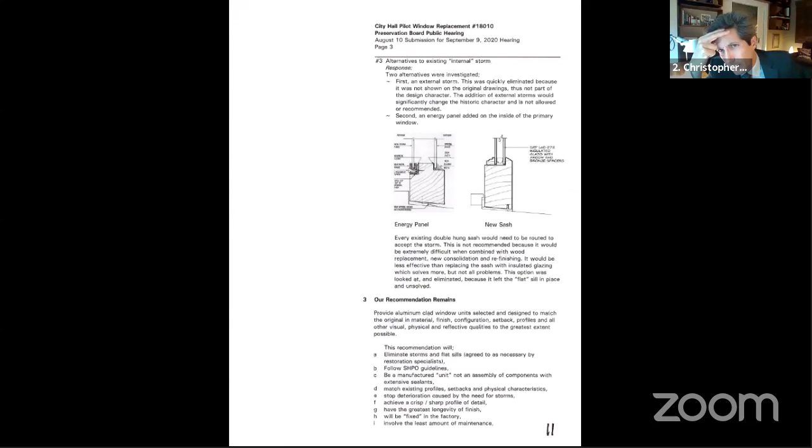Okay, so Mike, plus they're old, plus, I'm sorry to interrupt, Gerald, but plus it's old growth. I mean, they don't grow wood like that anymore, unfortunately.

Well, and that's part of my worry. Part of my worry is we're taking out old growth sills and replacing them with new materials, which might not match. Rotted old growth sills. So, okay, so Mike, following up on that, my last question is about materials.

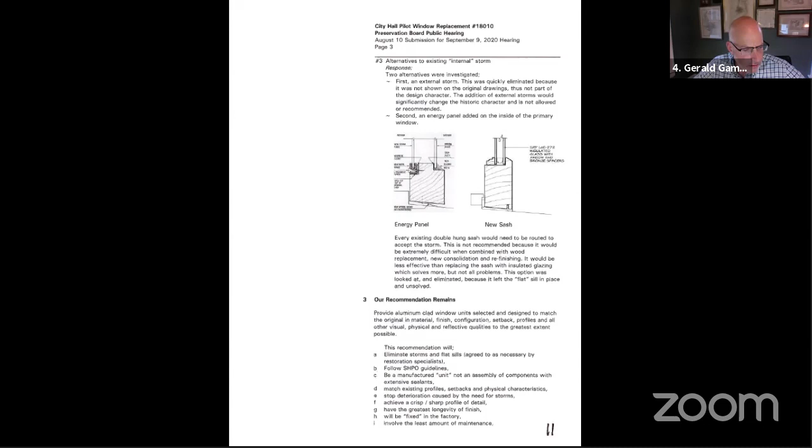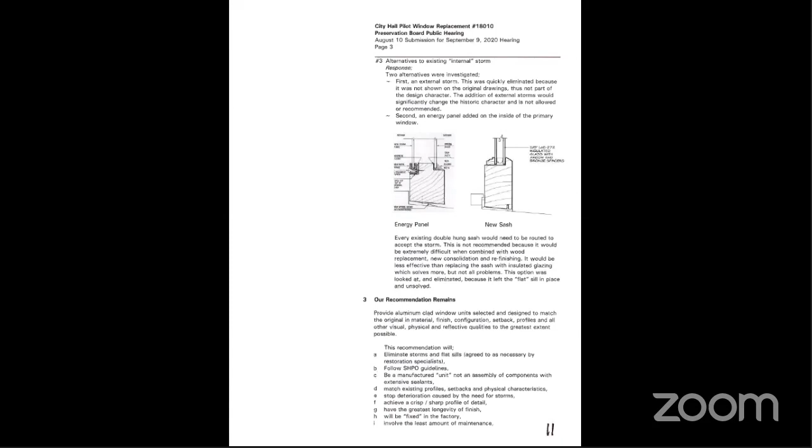What are the current sills, wood, and the current windows wood? That's my understanding, is that right? Yes. Okay, so what would the material be for the new sills? All the new windows would be pine, but they're covered with aluminum. And I don't know, Chris, I'm not sure who kept the window sample from last time.

Mike, just so you know, we're all in our homes. So even if Chris has the sample, we can't actually hold it tonight. It may still be in the office. I was hoping he could hold it up.

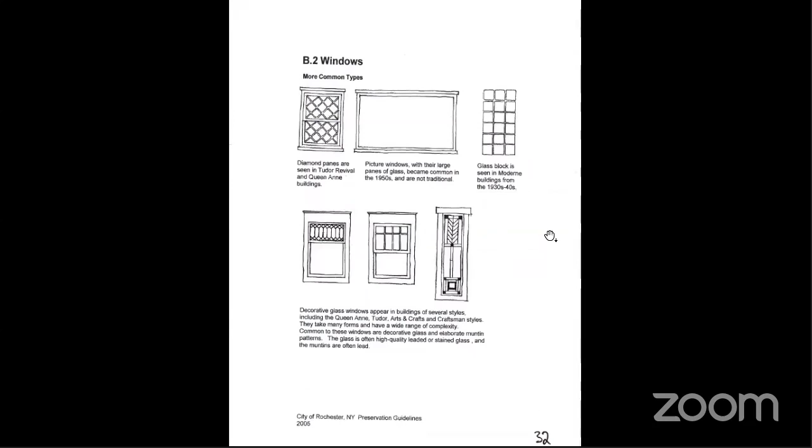So I had a different question, Mike. So the sills are currently wood, correct? Yes. And the windows are currently wood, correct.

And the new windows would be wood, but they're all covered, they're all aluminum clad windows on the outside. The inside is a stained wood. So why not do solid wood windows and solid wood sills if we're trying as hard as we possibly can to restore the structure, restore the windows to original condition?

For the simple reason that the aluminum can be painted in a custom color to match the existing, and Marvin has gone through great detail.

Chris, can you go back? Do you have the original submittal where we had a drawing in there? Is this the one you're looking at? No, all the pages are numbered in this application. The original submittal from last year. Oh, I did not include the original submittal, just the staff report.

All right, I guess I'd have to try to explain this. The new windows, when you look at the original drawing that we submitted last year, they're wood windows with an aluminum cladding that match the profile. They have the rope molding, they have the same setbacks, they have the same sash dimensions as the existing. The main difference is the sill is sloped. This is one reason why SHPO had approved this - when they made these, they match the existing profiles almost exactly.

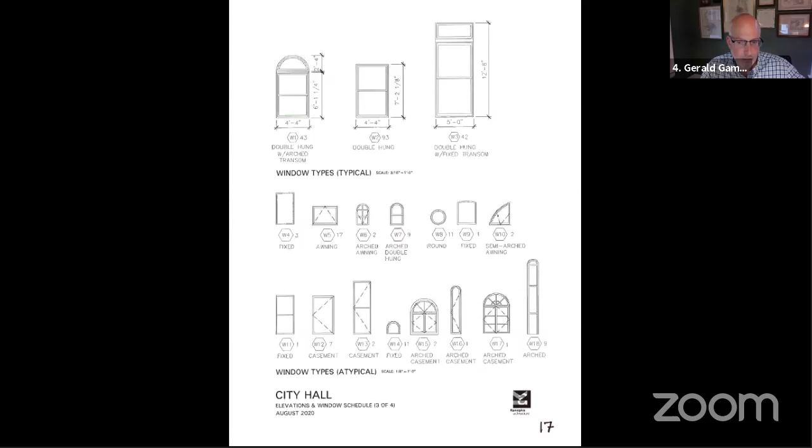It's just not a typical option that's offered today at this scale with this many windows from a maintenance standpoint. But to answer your question, it probably could be, but it's not something at this scale that's typical today when you have a less maintenance option that matches the profiles. And it's a painted surface, a solid color.

Any other questions? I think the scale of the replacements is also an important point, given there's 207 windows in City Hall that all need attention.

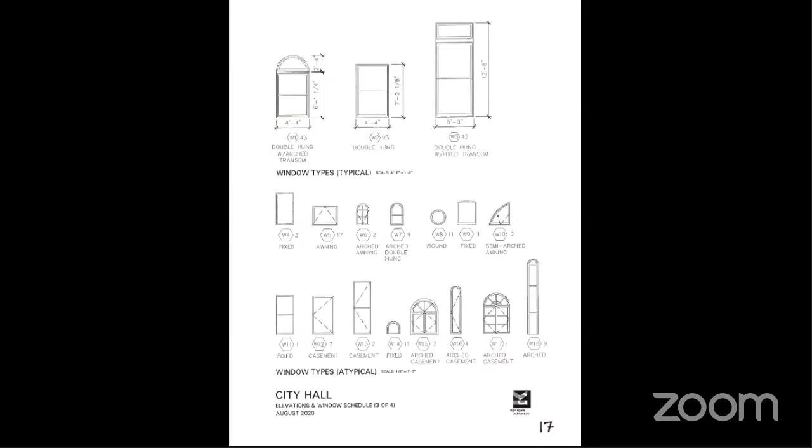Okay, thank you. Any other questions, Gerald? Karsten, any questions for Mike or Laura? My only question was going to be if SHPO had approved the profile, and you said that they have. I will refrain from comment until the comment section. The approval letter is in the submittal. Right, and I remember that now. Okay, thank you.

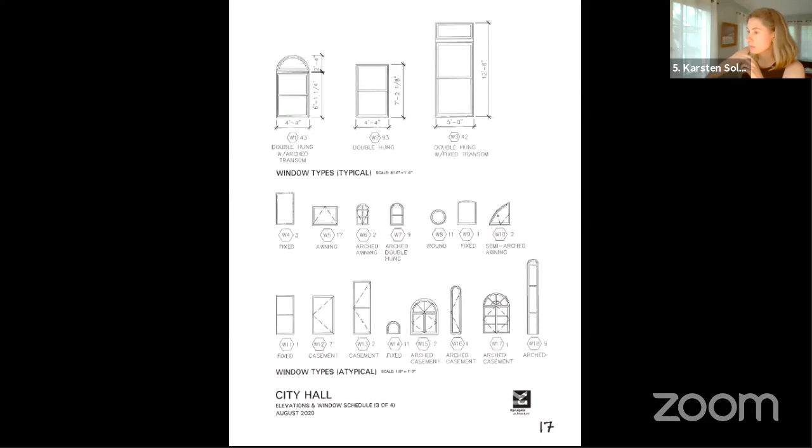Mr. Snyder, public testimony statement? There is no public testimony for this case. So we can move on to the deliberations.

Let's start with Mr. Kane. What are your thoughts on this, please? My thoughts are that what's been proposed is a reasonable alternative. Okay, thank you. I would agree with Ed.

I think the fact that SHPO also approves this says a lot. Although, you know, we are separate, but I still think that means a lot. And I think the profiles are extremely important, that they are going to be as close to exact as possible. I don't have an issue with the way it's presented. I'll keep it short and sweet.

Mr. Davini? I agree with you and Ed. I think that the SHPO comments are very important to our discussion here. And I think the appearance is very important to the final product. So I'm not opposed to what they're proposing.

Gerald? I'll keep it short and sweet too. These windows and these sills have lasted 130 years, and I am very, very reluctant to replace them. If we are going to replace them, I'm reluctant to replace them with aluminum clad sills and windows without at least understanding better what would be involved with doing it in wood. So that's my concern.

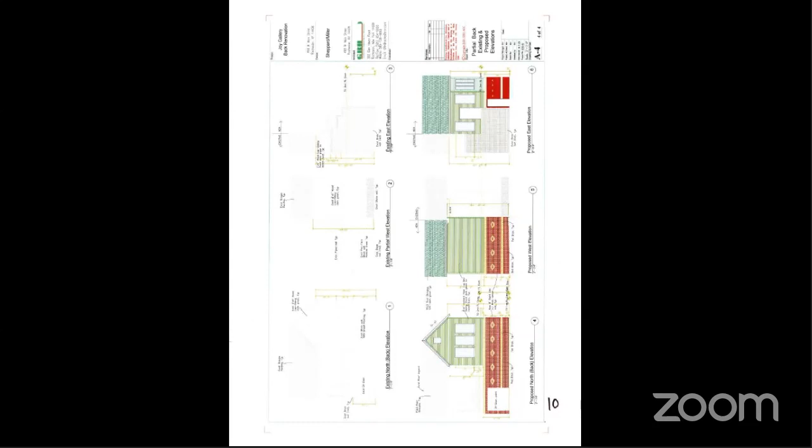On the bottom, we're still going to renovate the structural portion of the whole first floor on that back portion because the structure is pretty much deteriorated badly. On the first floor, as you see, we're proposing block and brick on the bottom. On the side, you need a rated wall, but that's just wood with two layers of chipboard on each side, and then the non-combustible cement fiber clapboard. That's pretty much in a nutshell.

Okay, great. And the model, I cut the model up a little bit. I don't know if you can see it or not. My camera is not on and I don't know why. Okay, maybe something is off.

Oh, here. Mr. Harmnash, there you are. This is Tom Worth from the Law Department. Last time you presented, you had a model that didn't quite match what the proposal was. Is the model you're using this time actually match what you're proposing?

I believe last time what we proposed and the model matched, that's my personal opinion. But what happened, the portion that he didn't want got removed. Well, I don't want to argue about last time, but you're saying that what you have this time matches what you intended, what you're proposing. Yes, sir, the model and the drawings are presenting what we are proposing.

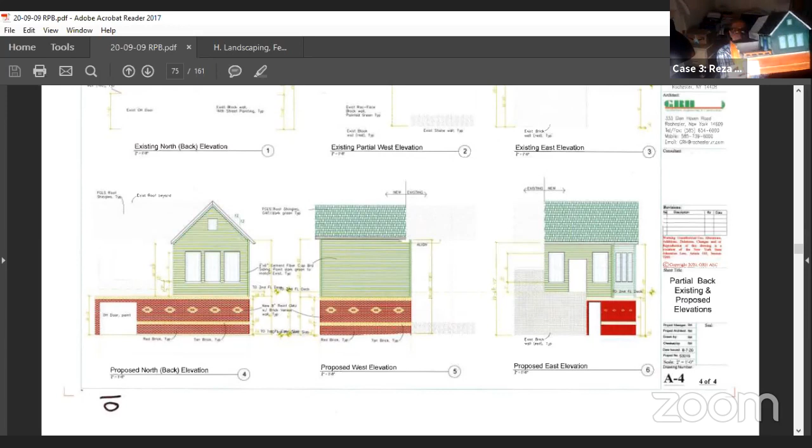It's Tom, much simpler structure now. Okay, thank you for the presentation. We're going to ask the board members if they have any questions for you.

So we'll start with Ed Kane. Ed, do you have any questions? No, I think I see what's being proposed. I don't have any questions. Okay, thank you.

I don't think I have any questions right now, but we're going to go to Jim Deviney, please. Yes, on that page 10 that is on the screen right now, I'm looking at the bottom floor, there's a garage door, and now it's all brick going over to the right. I assume that is where the mural is now. That's right on the alley, Clark Alley. Yes, sir, where the hand was moving that you were showing, that's where the mural is. It's a block wall, existing CMU wall, which has been hit like 2-3 times. And there's one crack which is obvious, there's another crack, it's a little bit bigger than a hairline crack.

Yes. Okay, all right, I just wanted to be sure I understood it because I got confused the last time. Thank you. Yes, sir. Okay, thanks, Mr. Davini.

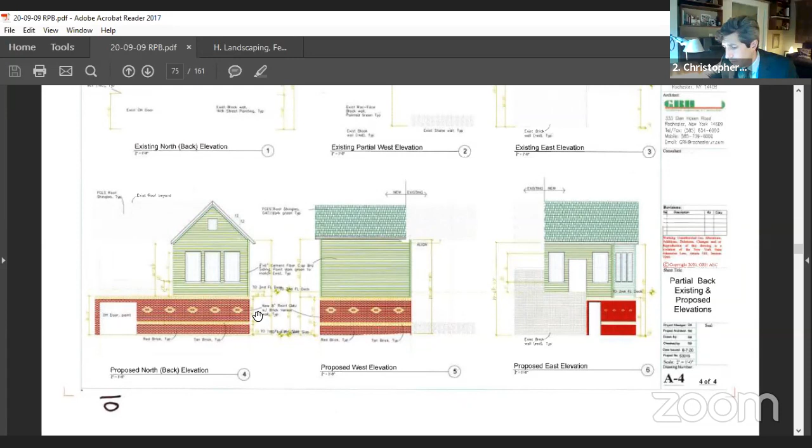Mr. Gam, any questions? Just a really quick question. I just want to confirm because the print is tiny, the brick is in fact real brick, yes? Yes, sir, it's a 4-inch standard brick matching the existing brick color.

Okay, and the clapboard is cement fiberboard, right? Yes, it's a cement fiberboard clapboard, which is going to be painted to match. I believe existing clapboard is a dark green color, so we're going to try to match that. Okay, and the roof is what? The roof is kind of grayish green, more green with a little bit of touch of gray on it.

I'm sorry, are they architectural shingles? Yes, sir. Okay, that's all. Nothing, what I presented, nothing has changed as far as the materials, everything. Basically, one portion of the addition got eliminated.

Okay, thank you very much. The windows are still wood windows, clad wood windows, stained from inside, and clad on the outside. The color is going to basically a tan color, but the owner wanted a dark, light green color around the window trim on the outside. I guess they have painted a couple of their windows light green, and that's what he wanted. I said that's fine, it's just a really intense color as far as I'm concerned. So on my proposal, I'm saying dark green with a tan border around the trim around the windows on the exterior. Okay, thank you very much, I have no further questions.

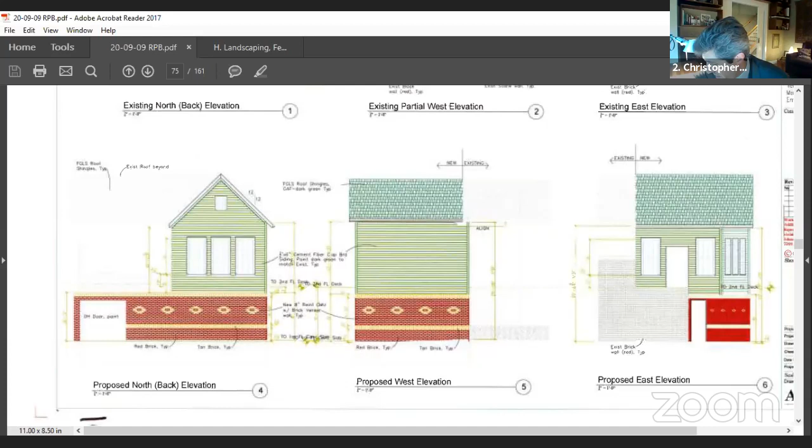I like the simpler version myself too. Jim DeVinney: Yes, I like what I'm seeing now. Mr. Gam: Same here. I think in terms of materials, in terms of design, it's entirely appropriate for the site. Good point. Kirsten? I agree. I think the integrity of the material and the form is consistent.

Okay, Mr. Gam, could I get a motion please? I would be delighted to give a motion in regards to file number A-011-20-21, an application for a certificate of appropriateness for 498 West Main Street to demolish an existing second floor addition at the rear of this property adjacent to Clark Alley and to reconstruct a new addition in the studio and office. That this application be accepted as presented.

I second. A motion has been made by Gerald Gam and properly seconded by James Davini. I will go down the list and call the vote. We'll start with Ed Kane. I want to interrupt really quickly. Sure. Gerald cut out during his motion, and I want to make sure I just want to clarify just for the record.

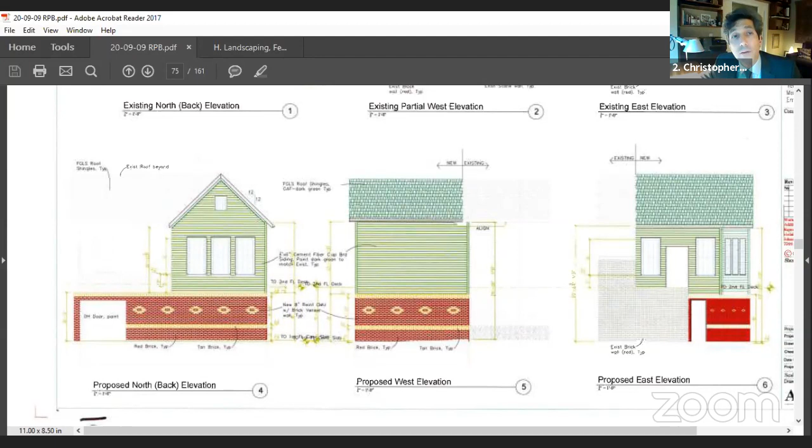Ed Kane, are you a yay or nay on that motion? Yay. Ed Kane is a yay. Christopher Coretta, myself, I am a yay on that motion. Jim Deviney? Yay on that motion, Jim Deviney. Gerald Gamm? Oops, you cut out again. I am a yay. Okay, Gerald Gamm is a yay. And Kirsten Solberg? Yay. Kirsten Solberg is a yay, so it's unanimous.

Thank you very much again, sir. And we will technically close this case. And Mr. Snyder will introduce the next item when he's ready. Thank you. Thank you.

The next case is case 4A-012-20-21 for a certificate of appropriateness. The applicant is Joseph Dasta, who is the property owner of 95 Merriman Street, and the purpose is to remove a locust tree located between the porch walkway and the driveway in front of this 3-family dwelling, and to replace it with a low-growth peony bush. All board members present have visited the site.

Mr. Dasta, are you with us? Yes, I am. Okay, great. Thank you, Mr. Dasta. Do you solemnly affirm that the testimony you're about to give in this hearing is the truth, the whole truth, and nothing but the truth? Yes, I do. Thank you. And we are ready for your presentation, please.

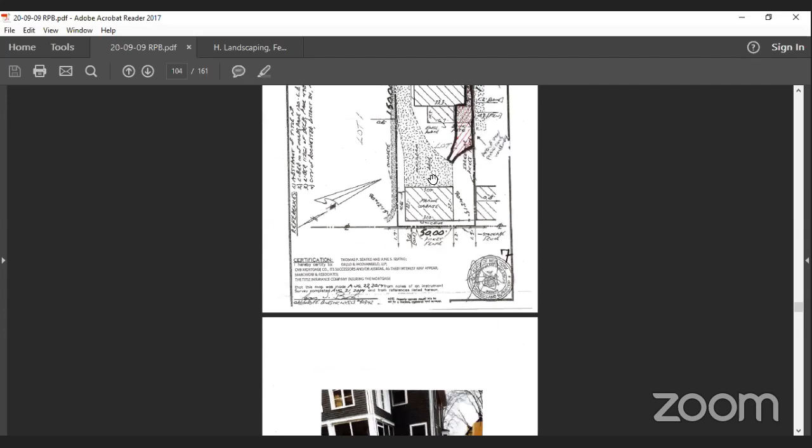I have one question. This is Tom Worth from the Law Department, and I just wanted to ask the applicant whether he was replacing any stone or brick before for this patio, or whether it was just lawn. It was, yeah, I think I'm on, yeah. It was a brick walkway from one means of egress all the way to the driveway. Also a brick walkway from the second means of egress, and it went to a patio landing and went to the driveway. So it was all brick walkway in connection with a patio.

I don't know if I'm saying the right words, but I think the picture's kind of... Tom, I think you can kind of see the original walkway over where we're showing and delineating in black here, where the new one is. However, the walkway that was original and in brick is not represented on this. Okay, but it just matches the map, it just matches what's next to it. No, the original one was here. So this was where the original patio was, and then this was a walkway leading to the door, and then there was an additional walkway that sort of followed the same path. That's correct. Yes, and then there's an additional patio area off to the side here.

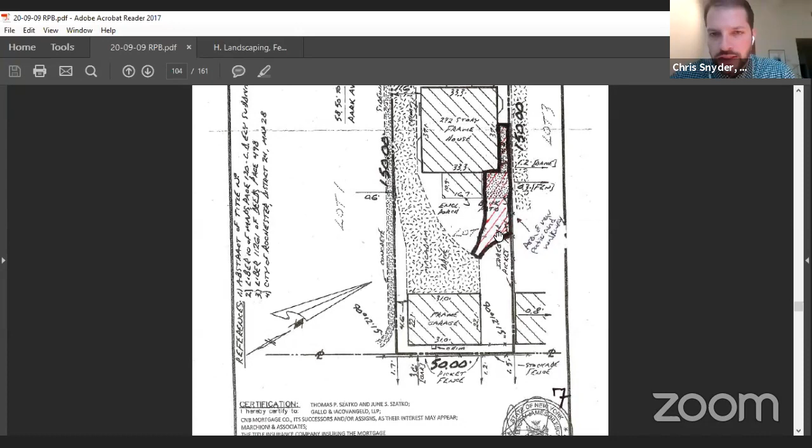So the brick, can you tell me what page the brick is on? Is it like on page 14 and 15? Okay, yeah, so it says previous patio materials. Okay, I got it, thank you.

Okay. So, Mr. Snyder, you'll put up the deliberations page for us? Yep, and we're ready to go into deliberations now. Okay, great.

Let's start with Mr. Kane, we'll go the other way. What are your thoughts on this, Ed? It's a toughie. I'm not quite sure what my thoughts are on this. Had the applicant come to us in advance of doing this... Ed, you're muted. Did you hear me? Can hear you, but it's really... Yeah, we're having some audio issues, it's like feedback. Try again. Okay, now you're good. I was saying that had the applicant come to us in advance of doing this project, I don't believe we would have approved it as presented. And it's always tough when we have these legalization cases, so I'll kind of wait and see what the other board members think.

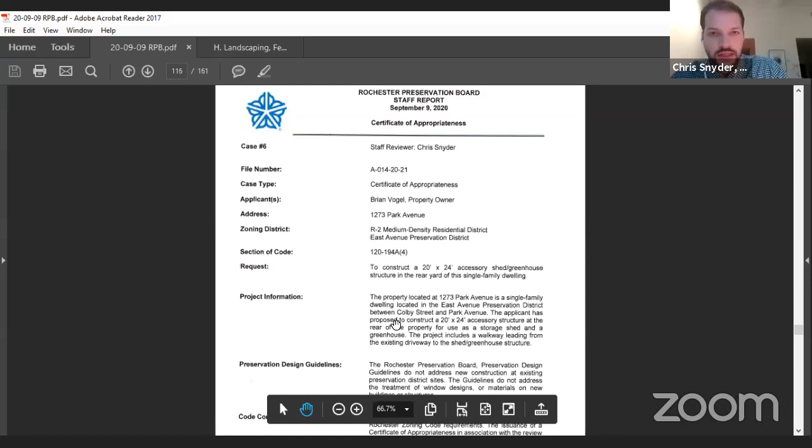Mr. Vogel, do you solemnly affirm that the testimony you're about to give in this hearing is the truth, the whole truth, and nothing but the truth? Yes. Very good, thank you. We're ready for your presentation, or however you want to give it to us.

Okay, great. Well, I'll start by sharing my screen so I can bring up the document if Chris would give me sharing permission, because I know there was some questions about the color of the building, so I can address those. Brian, I can't provide you permissions to share, but I can show the document on my computer, so if you direct me, I can do that. Yeah, I did paste a link into the presenter chat, the panel chat when I first joined the meeting. Let me just go ahead and paste the link in again. So you want me to bring that link up? Yes, please.

So I'll just go ahead and give a recap of the project. Like Chris said, we're looking to build a 20 by 24 foot accessory structure. The goal is to have the building closely match the house and the existing structures in the neighborhood, and cover up some of that concrete block. The property backs up to 490, so there's that sound barrier wall there, so it would be nice to have that structure in front of it. And it's a dual purpose building - it's going to function as a storage shed and workshop, as well as a greenhouse.

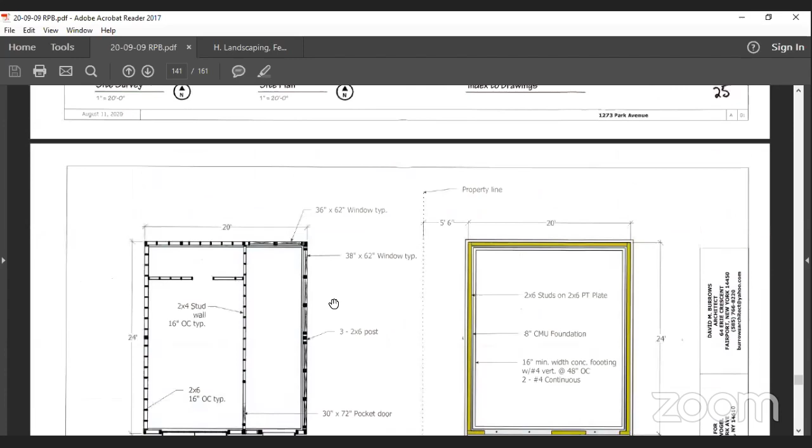So the west side of the structure is where the greenhouse portion is going to be. For that, we selected windows that would closely match the existing windows on the house. The existing windows on the house are a panel design, and we were able to find windows that closely match the appearance of the house. Since it's going to be a greenhouse, it's a high moisture environment, and the only suitable options for such an environment really are vinyl or aluminum. Vinyl was selected because it was appearance-wise the most pleasing.

I think everything on this side is pretty straightforward. The upper west gable there is a polycarbonate panel, which is detailed - the materials are detailed in the appendix. I think that pretty much covers most of the things from a high level that I wanted to cover. Besides the roof, there's two options for the roof. My preference is for a metal roof, just for overall maintenance and durability and environmental concerns, rather than using the same architectural shingles that are on the house now - it should last 40 years. So that's my preference there, and I think the brown color would look really nice and play off the existing house.

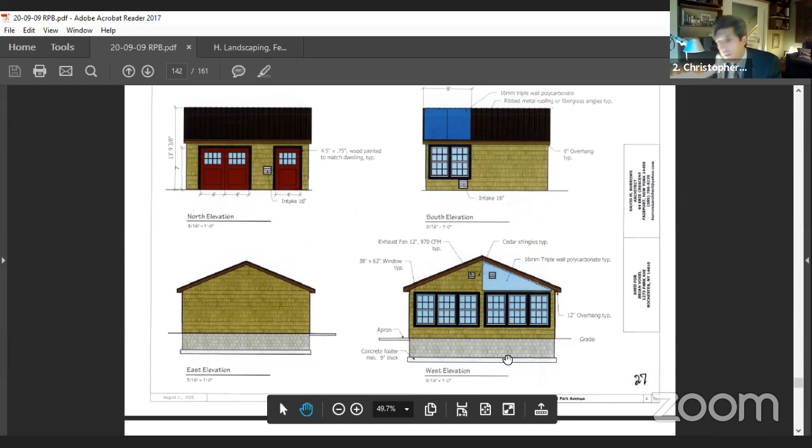Do you have any questions for the applicant, Ed? Yeah, just one question - with the metal roof, could you tell a little more about what it would look like?

Yeah, so if we go back to the rendering, the design document proposal, that's what it would look like. So... actually, okay, it's not on the screen yet, sorry.

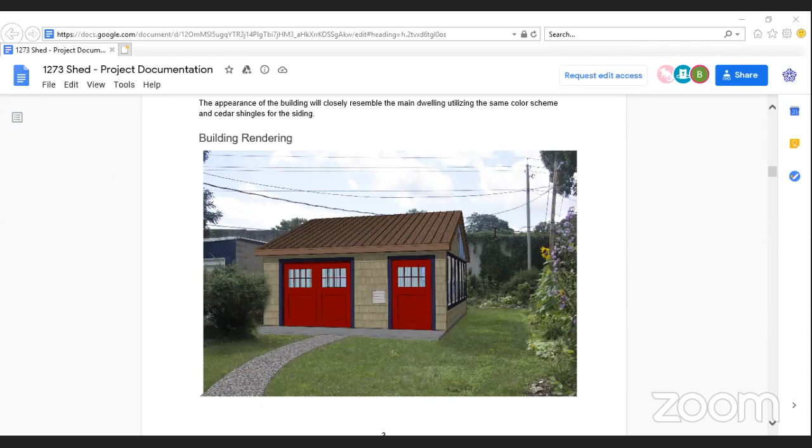You will see it. Can we zoom in a little bit maybe? It sort of looks a little bit funky, but basically there's ribs every so many inches. There's actually a profile drawing in the appendix of what that looks like.

There's also a house nearby that has pretty similar, if not exactly the same, profile to what I'm looking at. Metal Sales has a few different profiles. I chose that one because it's the one I like best, but I'm certainly open to changing that. Everybody has their own opinions, and I'd be interested to hear what the board thinks.

Okay, had any other questions? Was that answered for you? Yeah, yeah, thank you. Sure. I really don't have any questions, it was pretty well detailed. I think it's a really cool project, I like it very much. Thank you. Jim DeVinney? I have no questions, I like this proposal.

Gerald, any questions? Okay, so Brian, I do have a couple questions. First of all, the doors - so you said the red color of the doors is to match the burgundy color of the doors on the house. Are all the doors on the house burgundy, or just the main entry door? Yes, all the doors except the bulkhead doors on the basement, those match the shingle color of the siding.

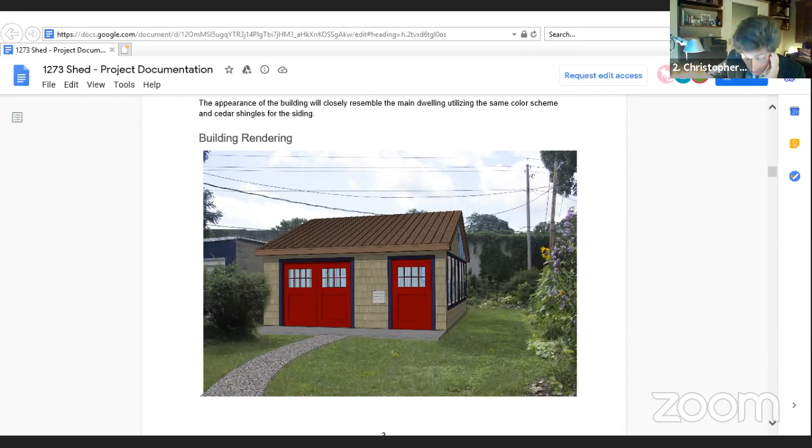Thank you very much, Brian. Mr. Snyder, any public testimony? There is, let me get to it.

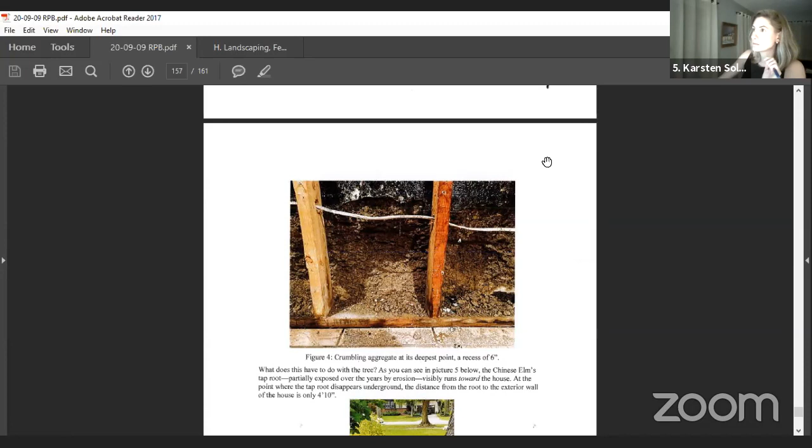Gerald, any questions? I have no questions at all. I thought it was an excellent proposal. Okay, thank you. Jim DeVinney?

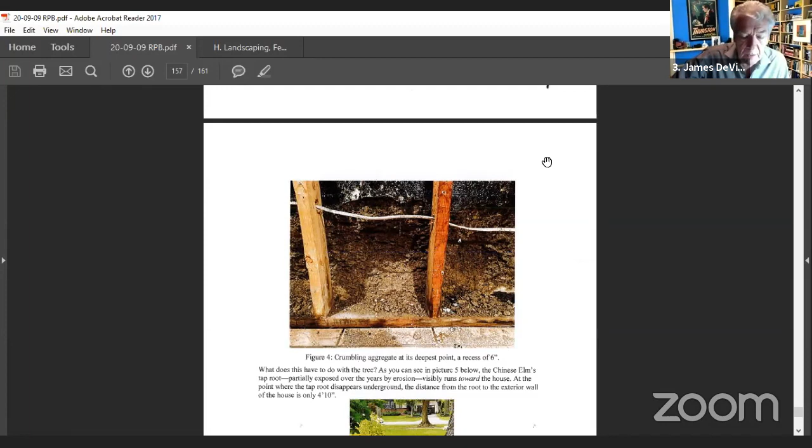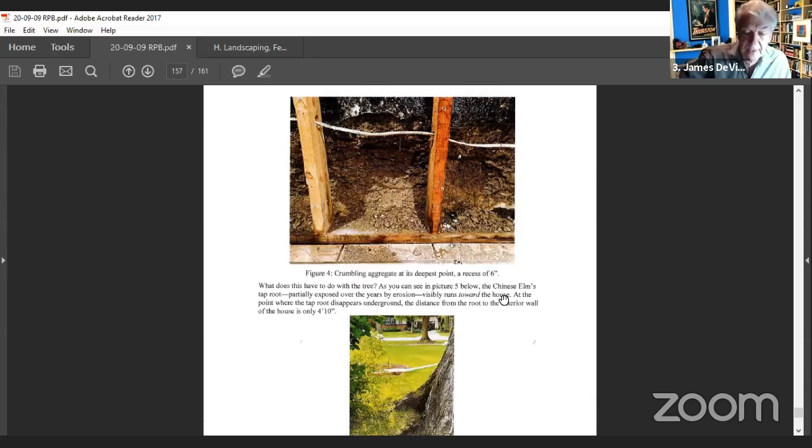Yes, I was the one in the pre-meeting who asked about additional paperwork from an arborist, but quite frankly it wasn't until the gentleman just explained that there would be excavation going on outside the wall, the retaining wall as well, and that the tree just can't possibly survive that. So yes, I think the tree has to go. Otherwise I have no objection to this proposal at all, and I will support it fully. Okay, thank you.

I have no questions. Ed Kane? Yeah, you broke up a little bit, I didn't quite get everything you said about the dogwood. Was your plan to put it in the same location or to move it forward?

What I was saying about the dogwood is that honestly, we're open to suggestion. We're not committed to replacing it with a dogwood if the board thinks that would be unwise. We certainly could move it forward. We feel badly for the neighbors who use that driveway. We have an elderly neighbor who goes out with his walker and uses that driveway, that's not our driveway, it belongs to the next door neighbor. He uses his walker out there with a nurse assistant to try to walk back and forth. So we'd like to reshade it, I guess, to make it more livable, because the neighbors are going to really miss the shade on that side. But we certainly have no interest in jeopardizing the house all over again, so we're open to suggestion on that front.

Well, my suggestion is if you do replace it, you might be better to move it closer to the sidewalk.